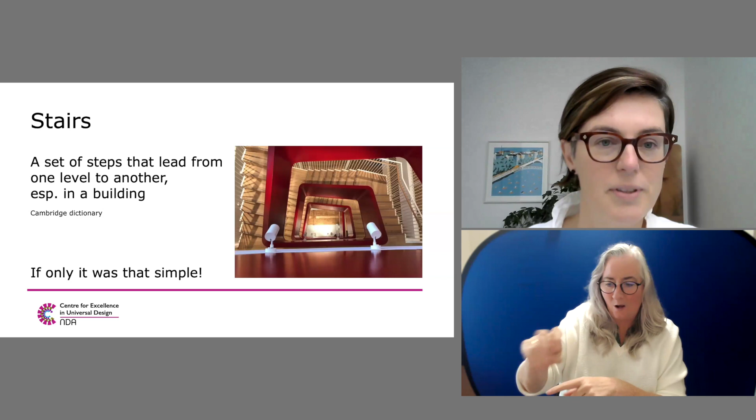Description: a stairs is a set of steps that lead from one level to another, especially in a building. But we all know as designers that there's a lot more that goes into it than that.

If we go back through stairs through the ages, some of the earliest stone steps we know of are on Orkney in Scotland, at a site called Mine Howe or Minahow. It's an Iron Age site, and under a stone corbelled roof there is a set of steep stone steps that we think would have brought the user down in a spiritual way to the underworld, so it was a passage down to the underworld, something very symbolic. That set of stairs had a landing, so they were way ahead of themselves even back then.

Looking back at some of the earliest timber stairs we know of, they are in a city close to Vesuvius. During the eruption of the volcano in 79 AD, volcanic ash covered this set of timber stairs, and that is how it's been preserved to this day.

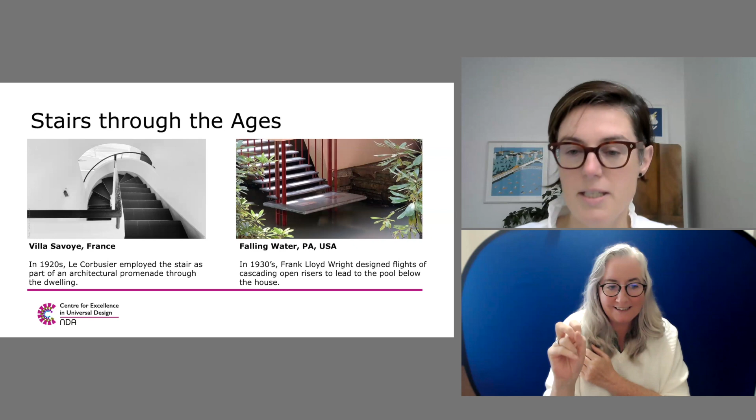More recent examples on this slide: Le Corbusier's Villa Savoye in France shows a staircase, and Le Corbusier used stairs and ramps intrinsically in his buildings to allow a promenade, an experience of the buildings. Then in the 1930s, we see Frank Lloyd Wright's house Falling Water on the right, with a set of very detailed stairs cascading down to the pool underneath the house.

We've had a look back at various stairs and how they were used and why they were designed the way they were. At this point, particularly as designers, we need to think about who we are designing for now. In more recent times, Le Corbusier would have used this ideal man standard, and Leonardo da Vinci used that previously, with these ideal proportions.

There is a QR code on this page, and a link will go up in the chat also if you prefer to access it that way. I would love you all to pick up your phone to access this Slido website and think about what percentage of our population falls into the bracket of ideal proportions. Then put the phone down again and come back to me, because we're not done yet.

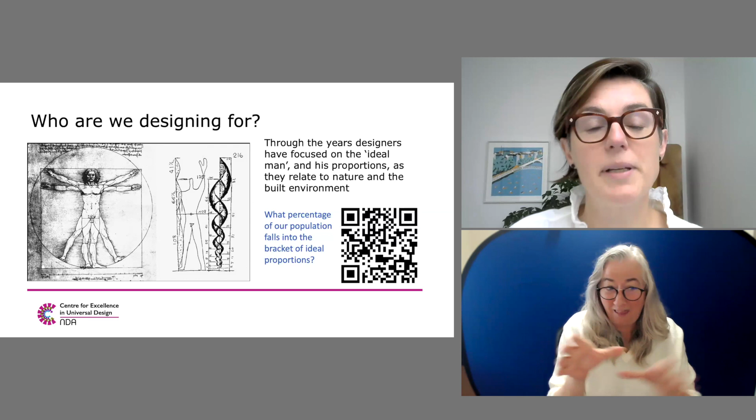If we think about how our building regulations have come about, the dimensions provided within those are very much catering towards a standardized person, which we know doesn't exist.

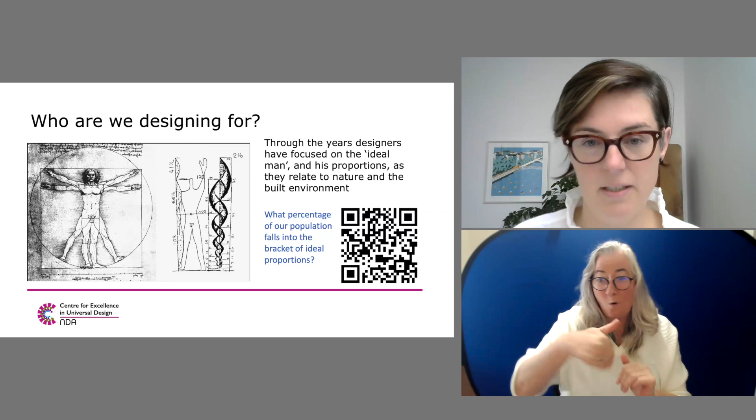So really, within modern society, and how hopefully our society and our design thinking is improving, when we go to design stairs, we need to think about the users.

If we think about the lead users we're designing for when we design stairs, what comes to mind for me is somebody who's visually impaired or somebody with a mobility impairment. But it's important to also think about the whole host of other people we're designing for.

Other people who could find stairs challenging may have issues with balance, fatigue, a fear of falling, which can often happen after you've suffered a fall, becoming very anxious about falling again and hesitant. Somebody who's anxious, somebody with a respiratory issue, for example asthma, or somebody with heart disease.

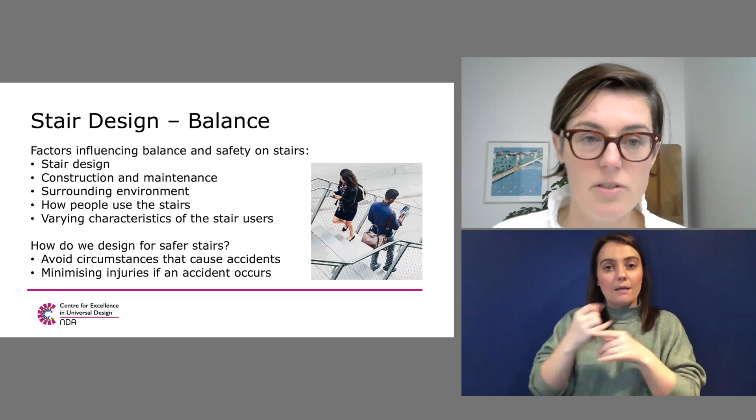So how do we design for safer stairs? We can avoid circumstances that cause accidents, and then if an accident does happen, how do we minimize the impact of that?

So I just want to show you a quick video here, which I think really well illustrates how somebody with lower mobility challenges would encounter stairs. I think it's a good visual to remind us why we need to think about nosings, treads, goings, handrails, distance between handrails, all of those things. Hopefully this will share okay here.

Brian is a 44-year-old man with LOPD. As with many people with LOPD, weakness in the pelvic girdle and proximal muscles makes it difficult for Brian to climb stairs. Notice how Brian relies on the support of handrails. He is unable to lift one leg while supporting himself on the other, and can only climb one step at a time. Overcompensating weak core muscles with upper body strength is a characteristic of LOPD. When using 2 handrails, Brian relies on his arms to pull his body up one step at a time. Similarly, when Brian descends the stairs, he requires the support of a handrail for balance at each step.

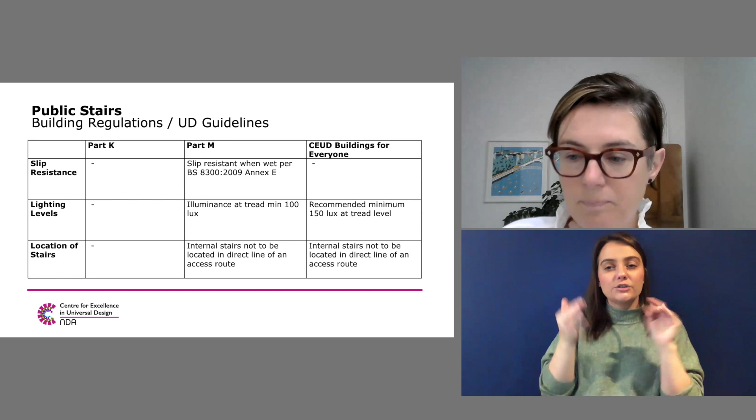And then for soffit areas under stairs, there's no requirement for guarding in Part K. In Part M, guarding should be provided where the soffit under the stairs is less than 2.1. And in Buildings for Everyone, there's a requirement to provide guarding and low-level cane detection or a barrier, so if somebody's using a cane, they can tap against that and know not to keep going.

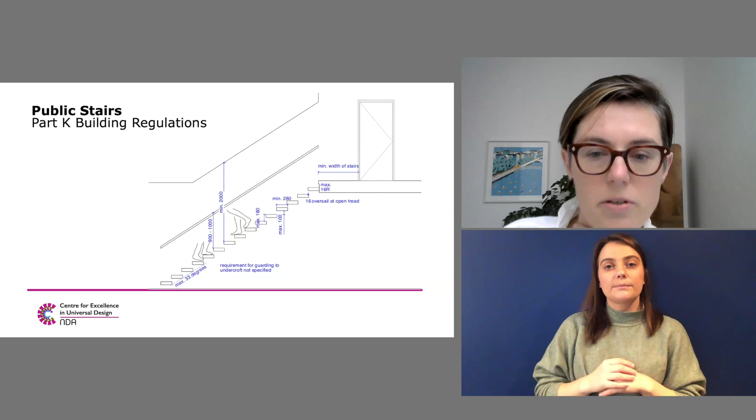So I'm just going to look at some diagrams which show for public stairs, Part K, the type of stairs that we can achieve just using Part K building regulations. So we have a max pitch of 33 degrees.

We've got a max rise of 180. We've got an open riser. We can have an oversail or a nosing. And we've got a minimum head height of 2 meters. There's no continuation of handrail at the top or the bottom of the stairs, and there's no requirement for guarding to the undercroft of the stairs.

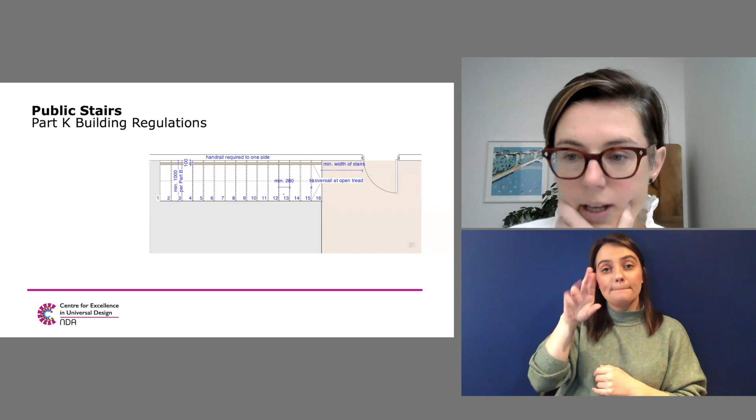And that's it in plan form there. So we're showing 16 risers in one flight. There's a handrail required to one side at that meter width. And yeah, so we've got a 16 mil oversail at an open tread.

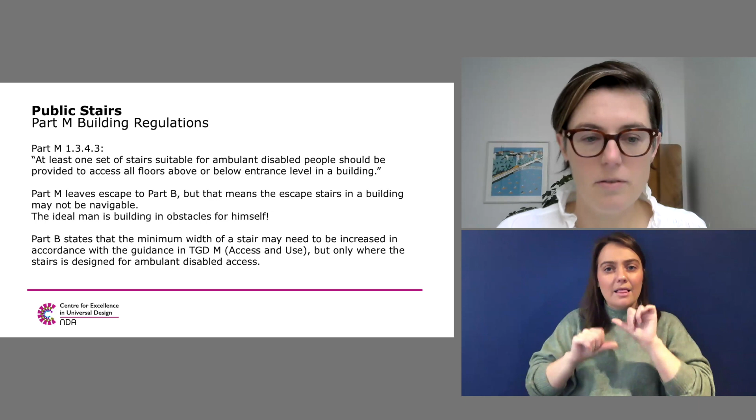So there's a little bit of, I find, you know, and I think as an architect, you're referring to Part B, Part M, Part K, Part whatever else, and sometimes they're telling you different things. And I think one of the big ones for stairs is that Part M states that at least one set of stairs suitable for ambulant disabled people should be provided to access all floors above or below entrance level in a building. Then Part M sort of leaves the escape stairs to Part B. So we could have a Part M compliant stairs as you come in, but then if something happened and you need to escape, now you're in a Part B stairs, which may actually be quite unusable for you. So it's nearly like we're kind of building in obstacles for ourselves.

So just quickly then, public stairs Part M building regulations. The handrail is turned in, or it extends 300 mil beyond the top and bottom step, and it turns down or in at the end. We've got a minimum 300 tread and a maximum 180 rise.

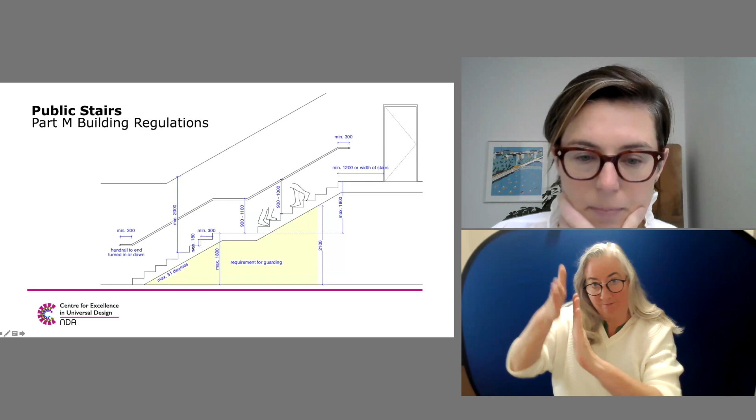So this is a much more generous stairs. We've got a maximum of 1.8 meters in the rise of one flight of steps, and then we require a landing. There is a requirement for guarding under the stairs, and given the maximum rise and minimum going, there's a max of 31 degree pitch for Part M stairs.

And in plan, we're seeing it there that there's a handrail both sides, that it's a minimum of 1200 mil in width, and that any door openings then are a minimum width of the stairs away from the top step.

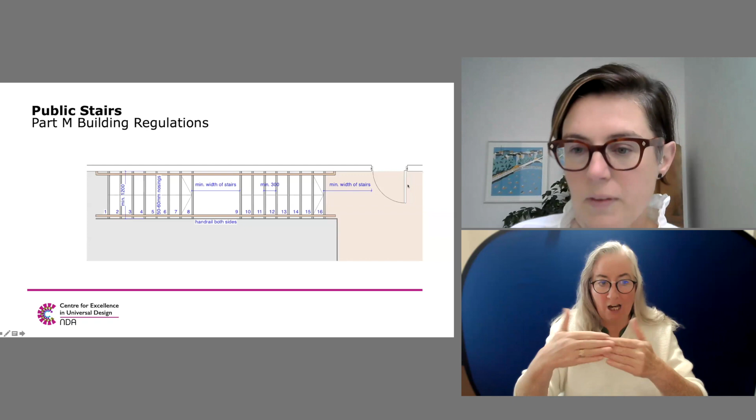So then if we look at a universal design guideline stairs, so here again the handrail extends 300 mil to the top and the bottom. It's continuous along the landing. We have a requirement for guarding and a tapping or cane detection rail to the undercroft of the stairs. We've got a max 31 degrees pitch. And again, there's a max rise of 1800 or 12 steps in any one flight.

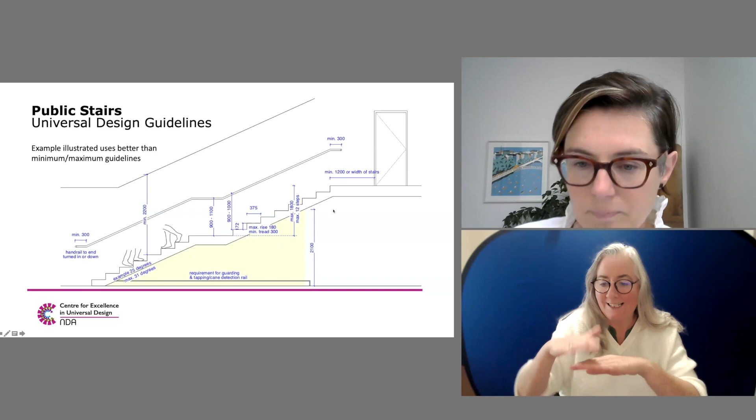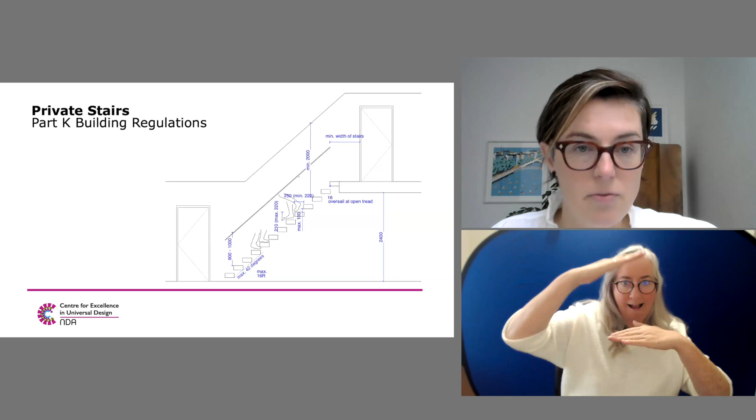So if we look at a private stair diagram following Part K regulations, we're seeing a max of 42 degrees pitch, a minimum of 2 meters head height, a max of 16 risers in one flight, a max 220 rise and a minimum 220 tread. You have to vary one or other of those to meet your 42 degree pitch.

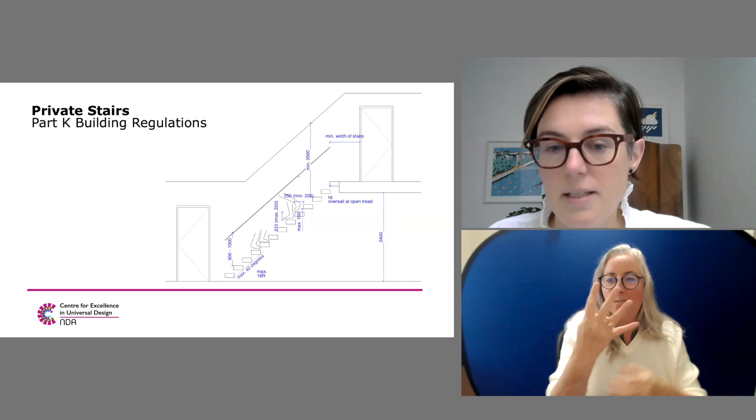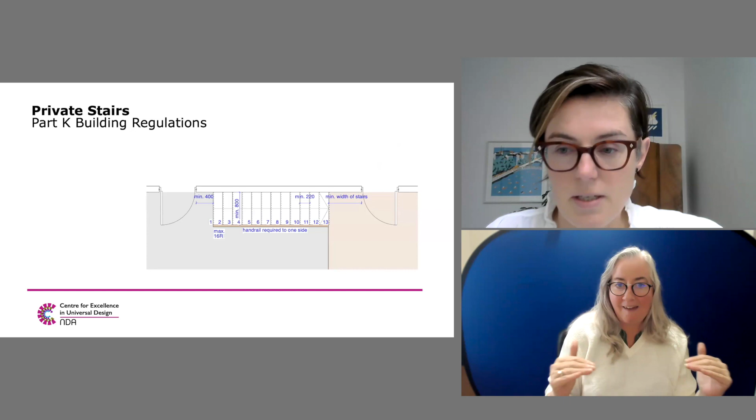This example of a stairs I'm showing has a 2.4 meter ceiling at the lower floor and a 300 mil floor depth, so the rise is 2.7 overall. That's the plan there. We're showing a minimum of 400 mil before a door opens onto the stairwell at the lower level, minimum width of the stairs at the upper level, and a handrail required to one side.

With the private stairs UD guidelines, we are seeing an ideal clearance at the bottom of the stairs of 1200 mil, which would allow for future provision of a stair lift. This would be the area to get onto the lift as you go up and down.

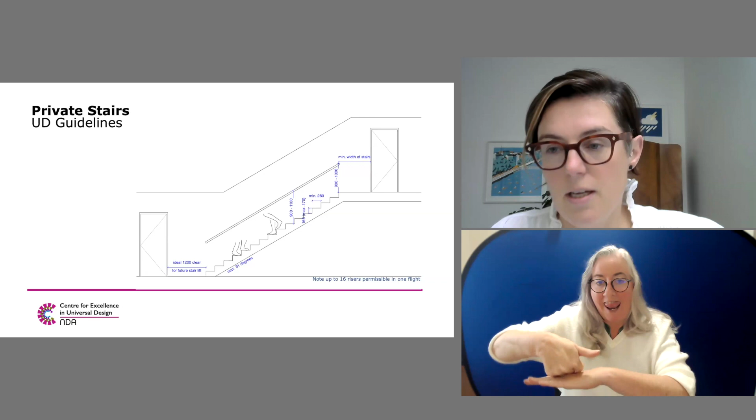We're seeing a max 31-degree pitch, coming from a max 170 rise and a minimum 280 tread, and a landing with a minimum width at the top of the stairs before a doorway. We can have 16 risers permissible in one flight, the same as Part K.

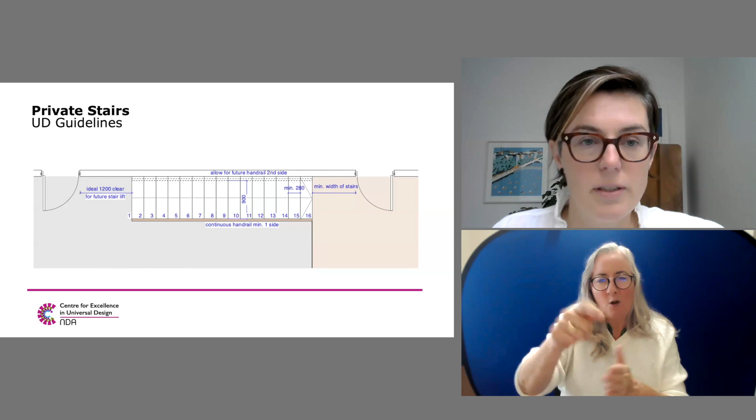In UD guidelines, one continuous handrail is required, but we allow for future-proofing to allow for a second handrail. If we think back to the video of the figure Brian, it was much easier for him to hold handrails on both sides going up and down the stairs.

Now I've overlaid Part K in the home versus UD guidelines in the home, and again we're seeing that what universal design stairs require is a generosity of space. It's not massive, but we do need more space. The difference in the two examples I've shown is 1392 millimeters in the length of the stairs, and there's an impact at the head height as well.

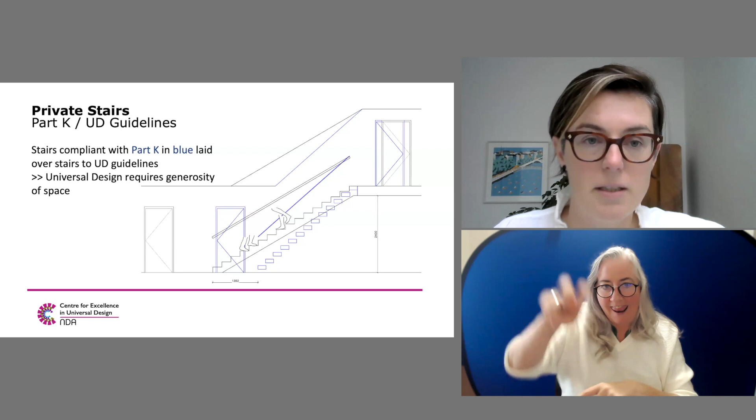Moving to handrails, Part K is very light on this, just stating that they should give firm support, should be readily gripped by hand, and may form the top of the guarding if appropriate. They're not required at the bottom two steps of domestic stairs.

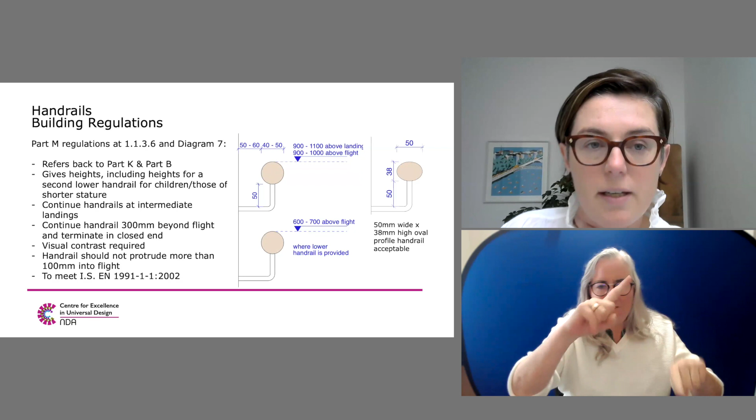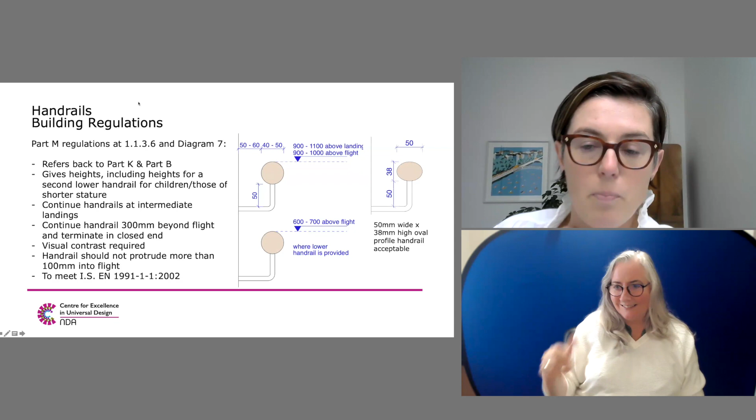Part M has further information on the sizing of handrails, spacing from the wall, and profile. There are varying thoughts on introducing a second handrail at a lower height, which can be appropriate for somebody of short stature or a child to grip. But in certain circumstances it may provide a climbing hazard, so you don't want somebody to put a foot up onto the lower handrail and then up and over the balustrade.

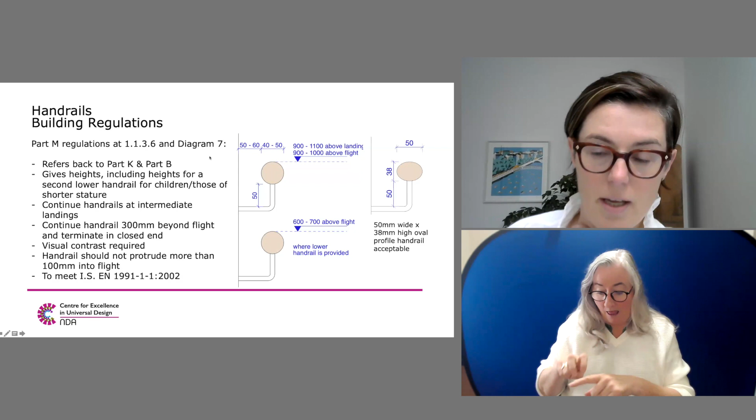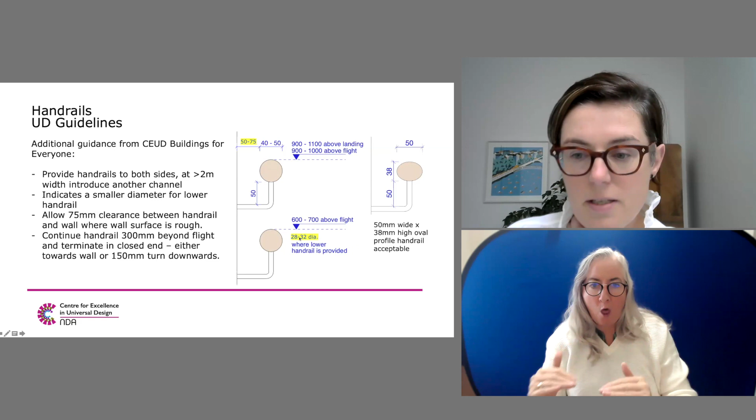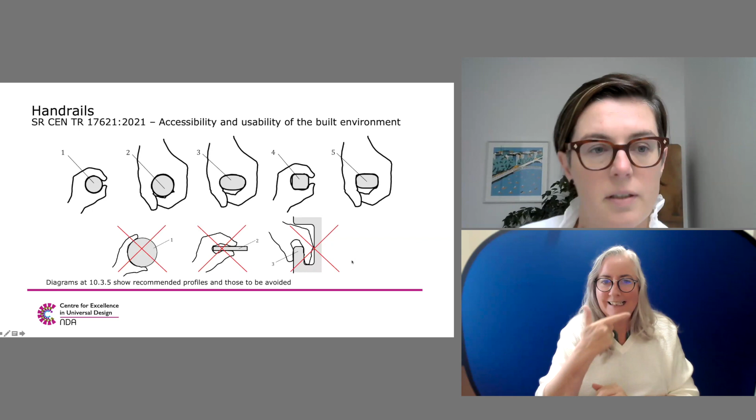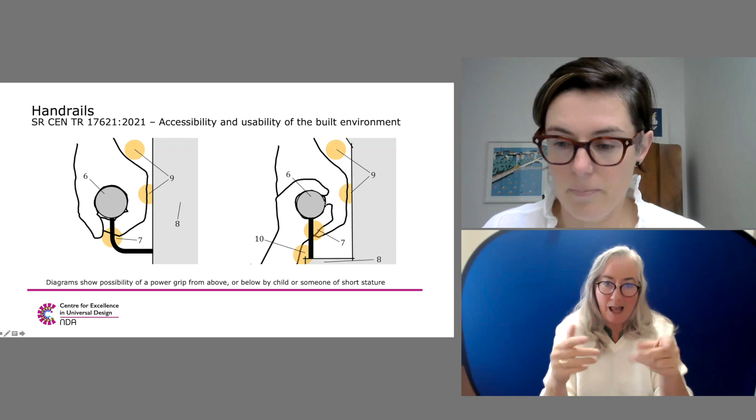So just thinking through existing stairs, there are lots of situations where an existing stairs can be improved greatly in terms of safety. I just want to show you a video here of this amazing lady. She's visually impaired and she's an advocate, and she films herself in various precarious situations with her guide dog. So I'll press play on that now.

This is how me and Miss Molly go downstairs in a really old building with windy stairs. Sweetheart, good girl, she's very slow with me. So we just take it one step at a time. Good girl, so we go really slow. It's quite precarious, guys. Good girl, Molly. Gonna hold onto the banister. Good girl, I can feel her harness. Go, tell me, good girl. Sometimes she's a bit uncertain because she knows I am.

So I think that video shows, generally a guide dog will walk to the left-hand side of somebody. So for this lady going down the stairs, because there's no handrail to the right-hand side, she's very reliant on the dog and just putting her hand against a wall for balance. Then she encounters the window and there's no wall now for balance. You can notice the video was a little bit clipped out. You kind of wonder, maybe did something happen?

So again, with an existing stairs, we need to think about what improvements can we make to make them more usable to the greatest range of people. There's a really good document published by the Department of Arts, Heritage and Gaeltacht, around access and improving the accessibility of historic buildings and places. So that's a good one to take a look at.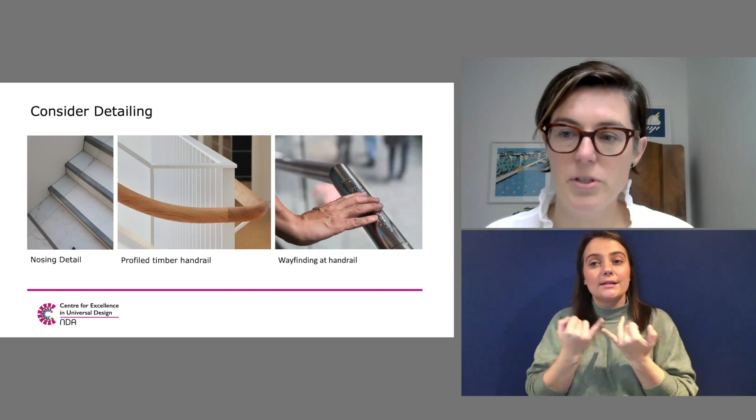Also, thinking about how we can make something really beautiful, the central photo shows a beautifully profiled timber handrail, which would just be a lovely thing to touch. And the image on the right-hand side shows that information feed that a stairs can give you, so braille as you're approaching the top or bottom of the stairs.

So in summary, as designers, as architects, we need to be thinking of the greatest range of users. If we want to build in a sustainable and kind way, then we need to be enabling people rather than disabling them. If we build buildings that enable people, they are more sustainable, they cater for a greater range of people, and we're going to see more people out using them.

I suppose we have a responsibility to inform our clients of how important that is, if that universal design approach hasn't come from the client as well. From our own work in our office, we find there's a joy in just thinking about each of those design elements and stopping to think, how can I make this a bit more accessible? How can I make this easier to use? How can I extend the use of this to the greatest range of people? It's a little bit more challenging, but when you get it and the building is produced, it gives you a much greater level of satisfaction in the work that you're doing.